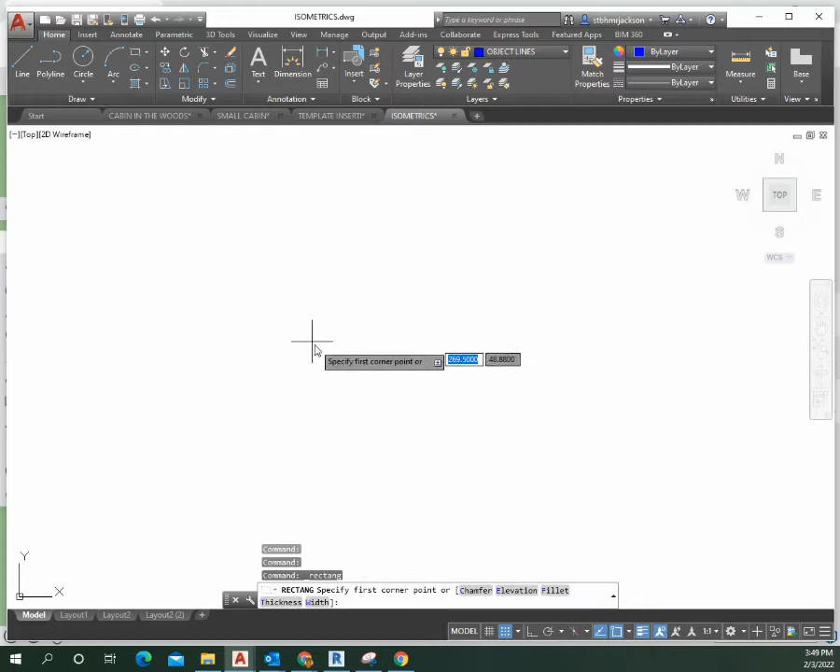We're going to start out with a square, 2.13 all the way around. You're going to use a rectangle for that, and I suggest using a rectangle instead of lines because it'll be a little bit easier in the end. So we're just going to do 2.13, hit the tab key, 2.13, and hit the enter button.

Now our next step is to rotate it. We're going to pick a corner, and we're going to type in 45 for the degree.

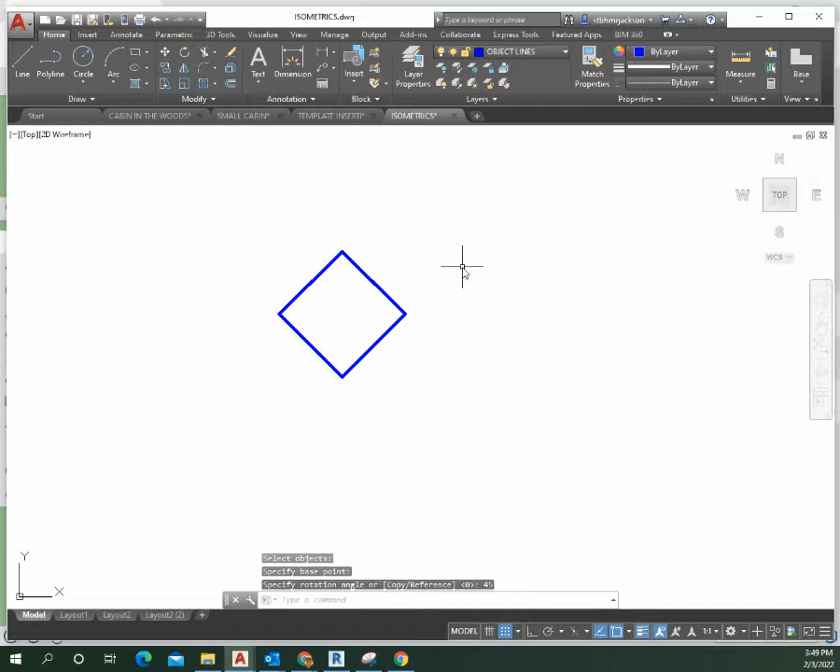So our next step, we're going to draw a line across the middle, and we're just going to make it a little bit longer than what we need.

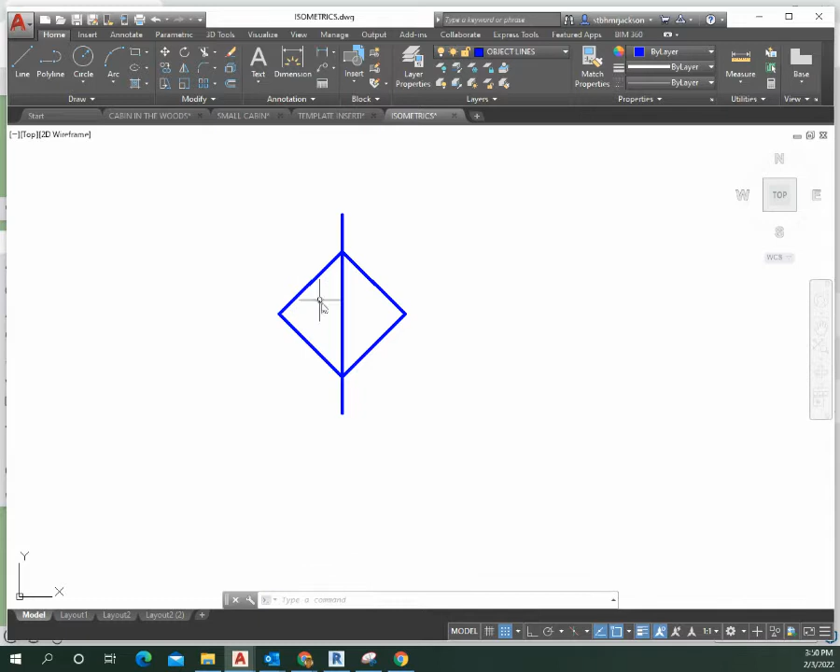We're just going to center it by using our tracking system. You can also do it mid between 2 points, and it'll work just the same. So if you grab it, select it, hold down the shift key, right mouse click, do mid between 2 points. It does the same thing.

Okay, our object is 7.5 inches long, so from one end to the next is 3.75 offset. So we're going to go ahead and make a line across the middle also.

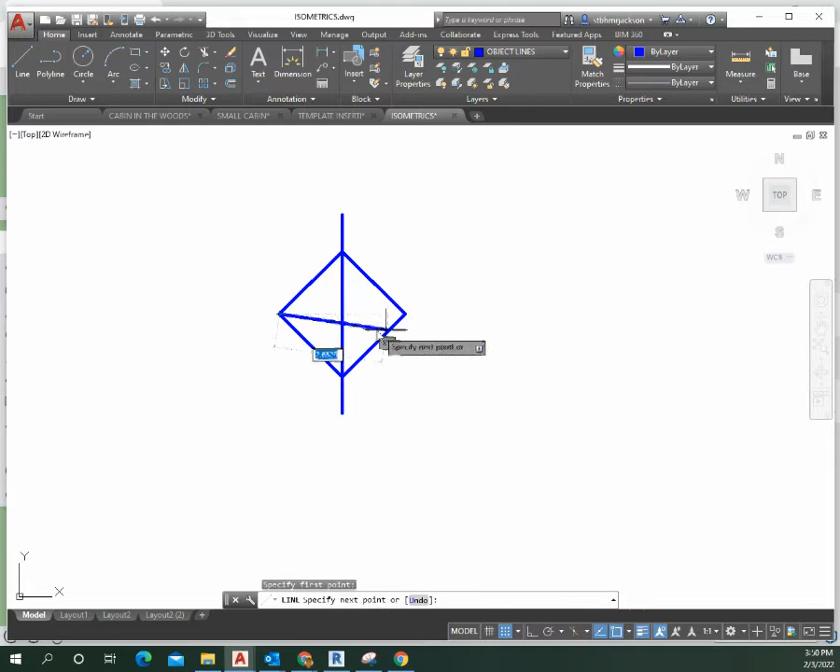We're going to do both our horizontal and vertical offsets. Those are going to be offsetting vertical and up and down 2.25. So the vertical line is going to be offsetting 3.75, and these are going to be offsetting 2.25.

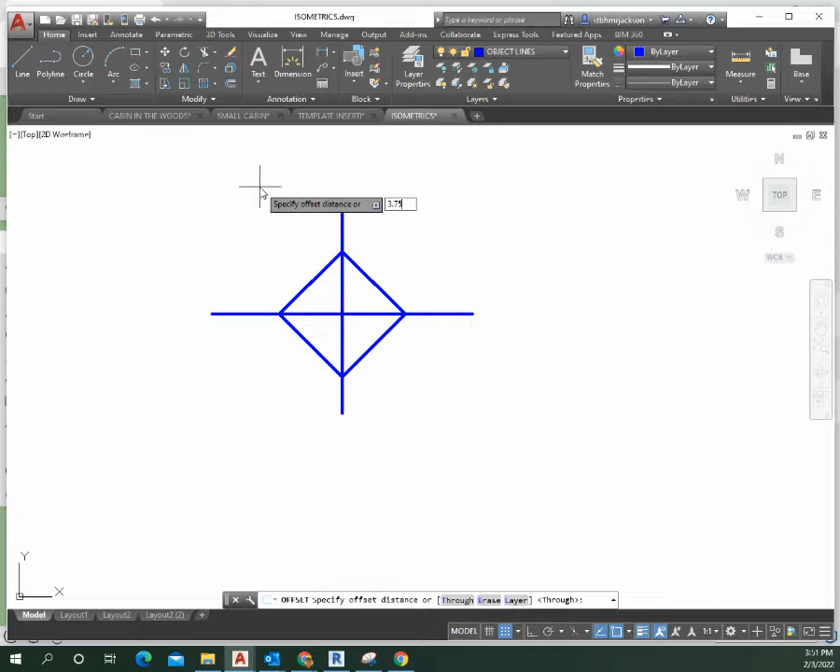So we're going to go ahead and do our offsets. We're going to click on our offset, or type in the letter O, hit the enter button, and we're going to do our first one, which is 3.75. So we're going to type that in, hit the enter button, click to the right and click to the left.

Then, in order to get our other one, we're going to do offset again. I'm going to replace the 3.75 number with 2.25, hit enter, and click up and down.

Okay, so our next thing we want to do is actually put in our little bells at the end.

We're going to close these up on the ends by using extend. So we're going to just click on it, hit the drop down next to trim, click on extend, hit the enter button.

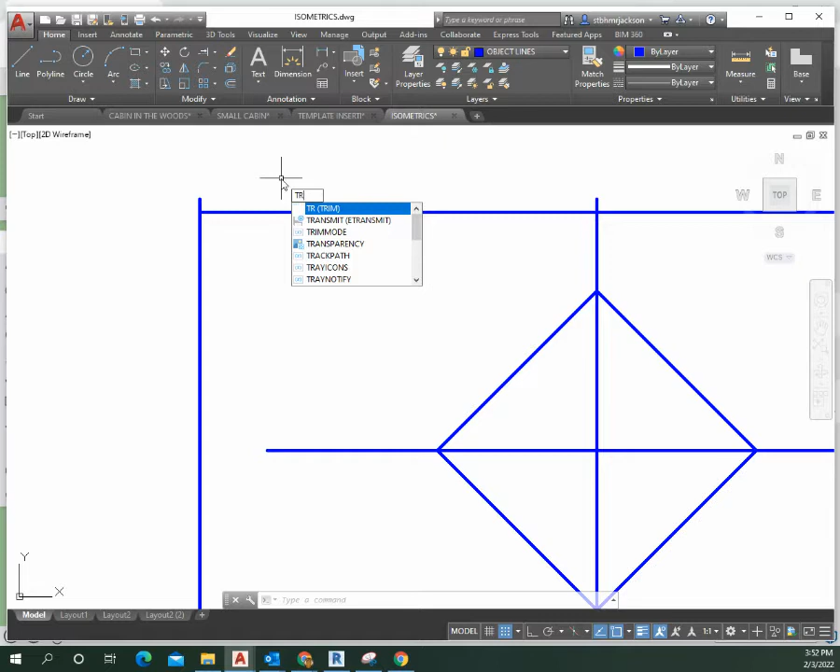And we're going to use extend to close these up. Since we got a few little pieces hanging off the edges, we can use trim for that. Do TR, hit the enter button twice, and we'll cut off all the excess.

Okay, so next we'll be utilizing our offset, and we're going to offset down 1.13. So we're going to be offsetting the top line down 1.13.

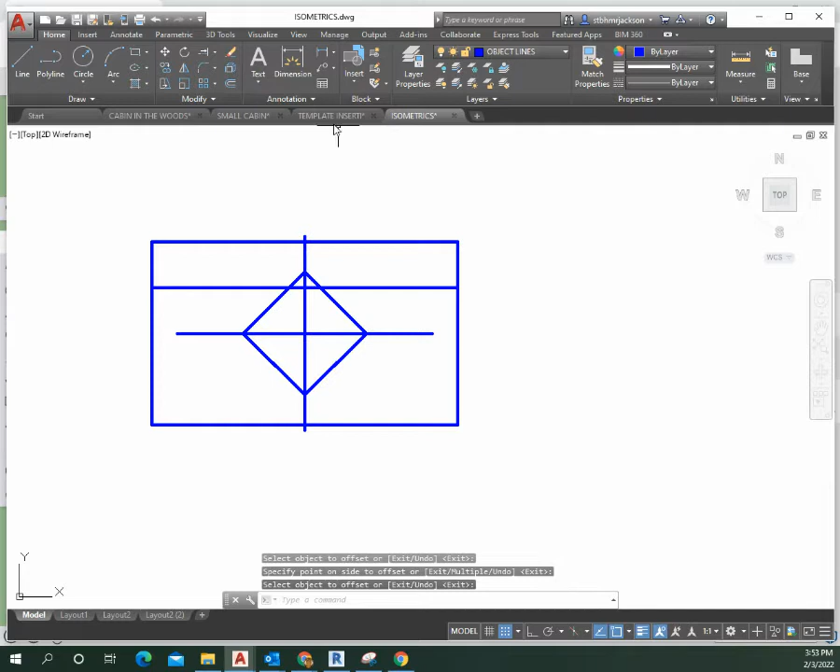And we're going to rotate that line 30 degrees. Now, since it has to go this way, it's actually going to be negative 30.

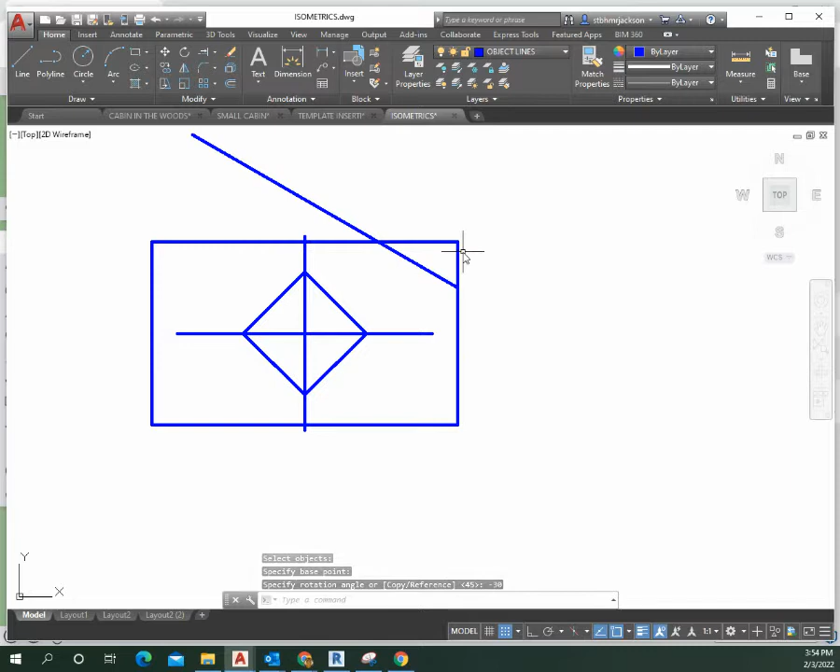Okay, so we'll do a little trimming. I'm going to select trim and then hit the enter button. Now, we can repeat that same step all the way around, but we can also use mirror.

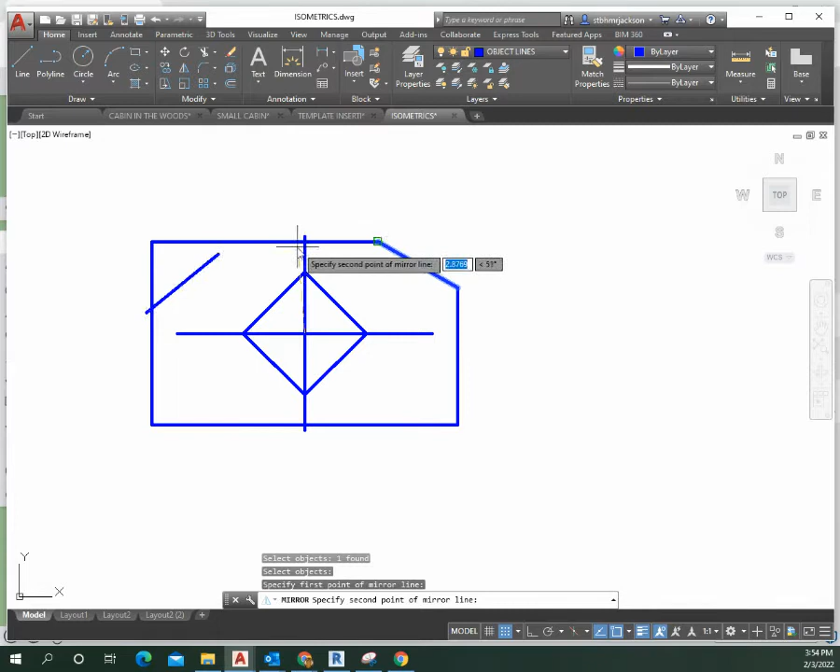So with mirror, we're just going to select the object and line up with the center, or pick a point that's on the center line here in the middle. So click once, hit the enter button.

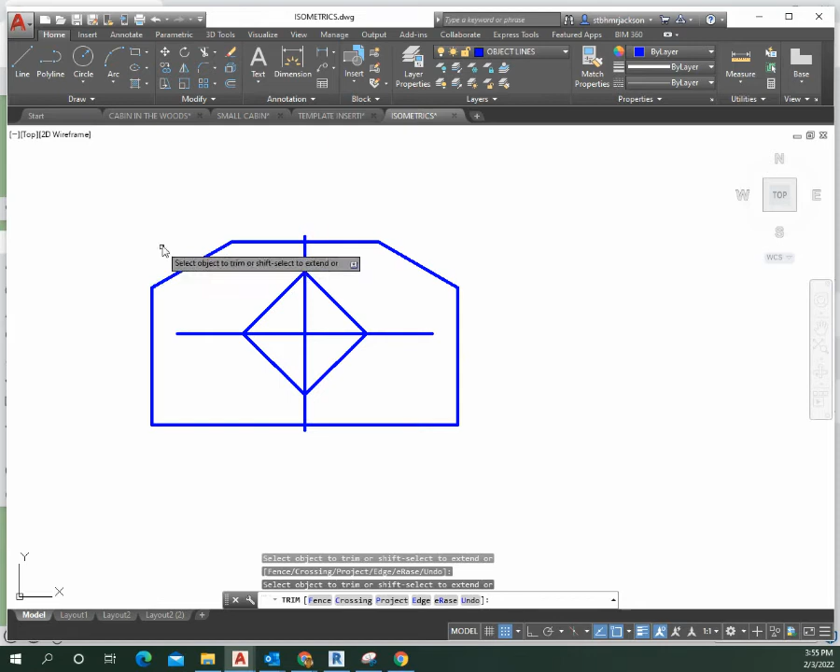To trim, mirror that to the other side. So here again, we're just going to trim. Click on trim and hit the enter button, or you can type in TR, hit the enter button twice.

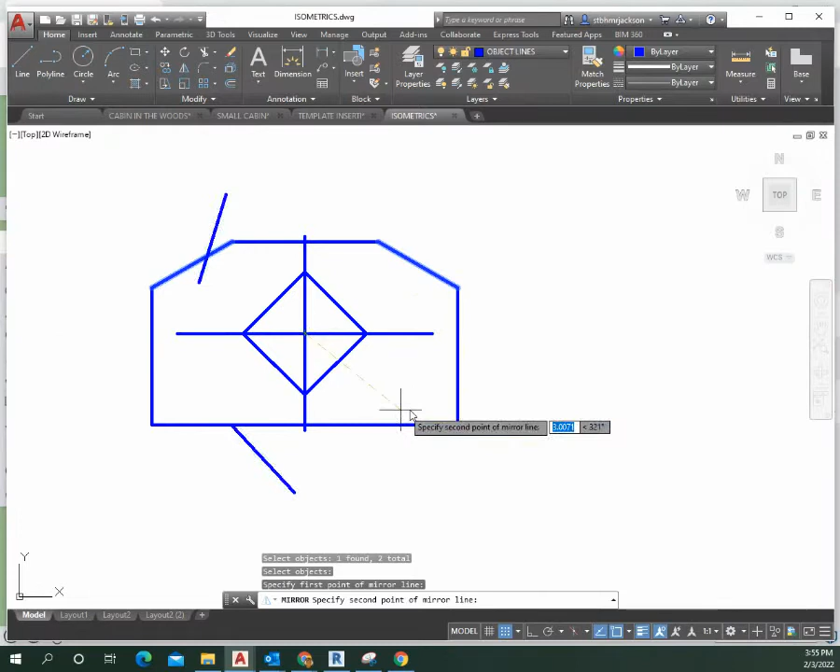Next we'll do the same thing for the bottom. We hit the enter button. After we select it, we'll go to the middle and turn our ortho on. If you're moving freely about, remember you can lock your mouse into place by using the ortho command.

So we'll go to the left or to the right and click once, hit the enter button once. And again, using trim.

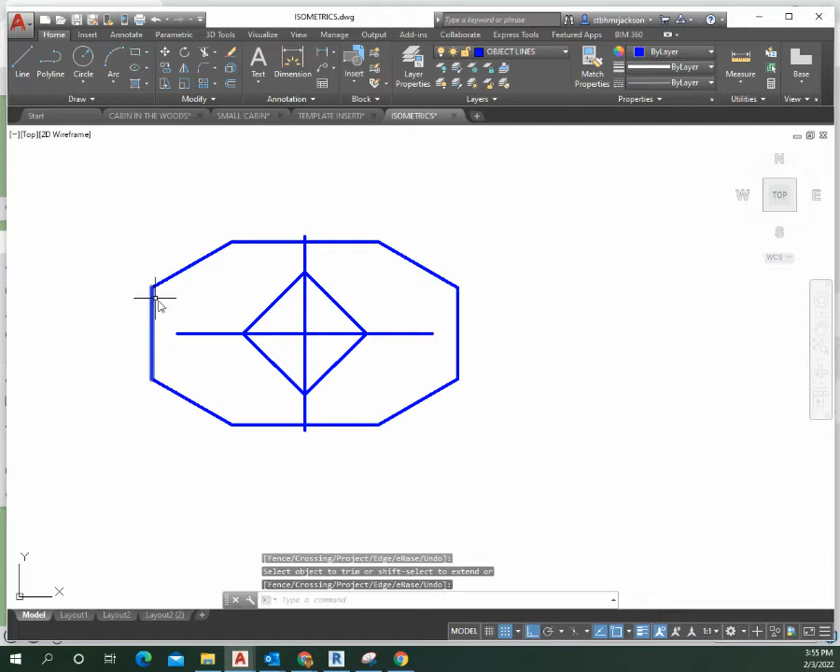Next, we're going to take our middle line here. We'll stretch it out a little bit. We're going to offset it 0.50 up and down. And then we're going to offset this line 1.50 inside.

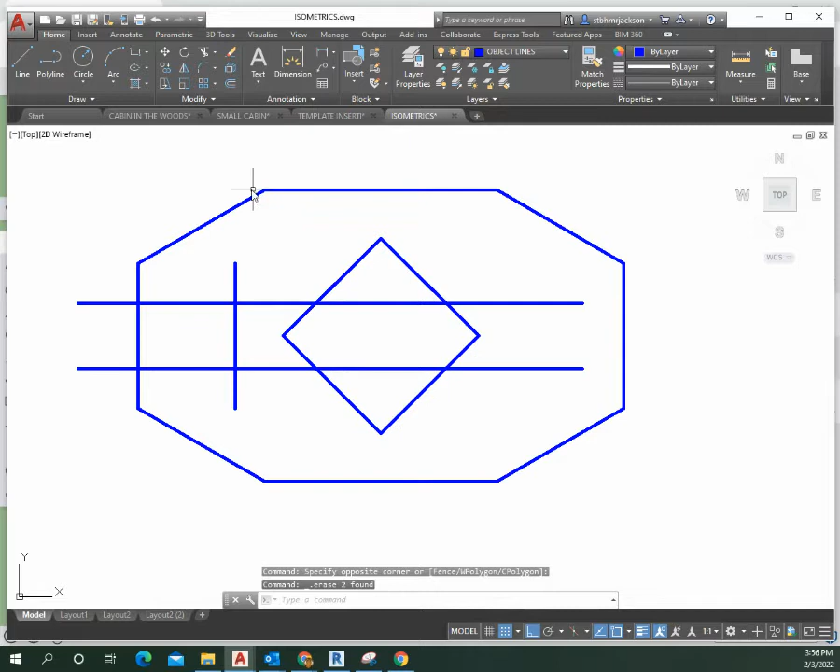We no longer really need all these extra lines here, so we can get rid of those. We're just going to do a little trimming. Click on trim, hit the enter button, and start cutting off all the stuff that we don't need here.

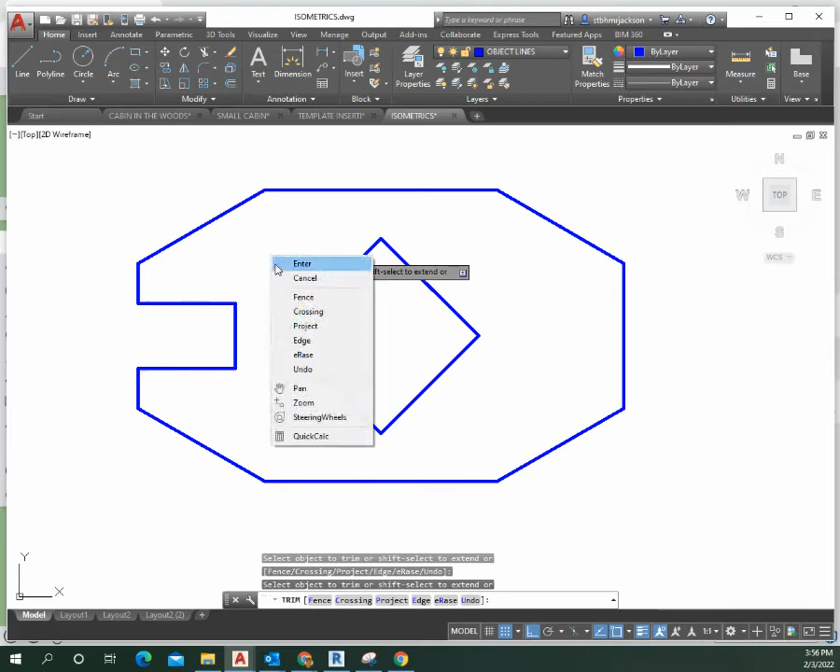And of course, you can guess what the last thing is, the mirror. So we're going to mirror these 3 lines. Enter. We'll pick a base point right at the top of this diamond, move our mouse up or down, click once, hit the enter button once.

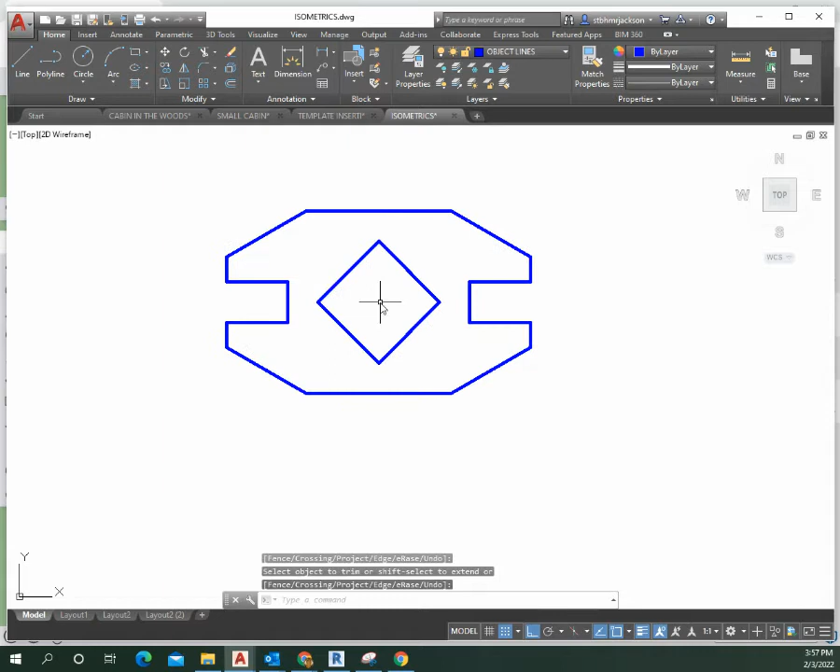Last but not least, we'll use trim again. And that is the completed gasket. So our last step is to just place a few dimensions on it that are on the paper.

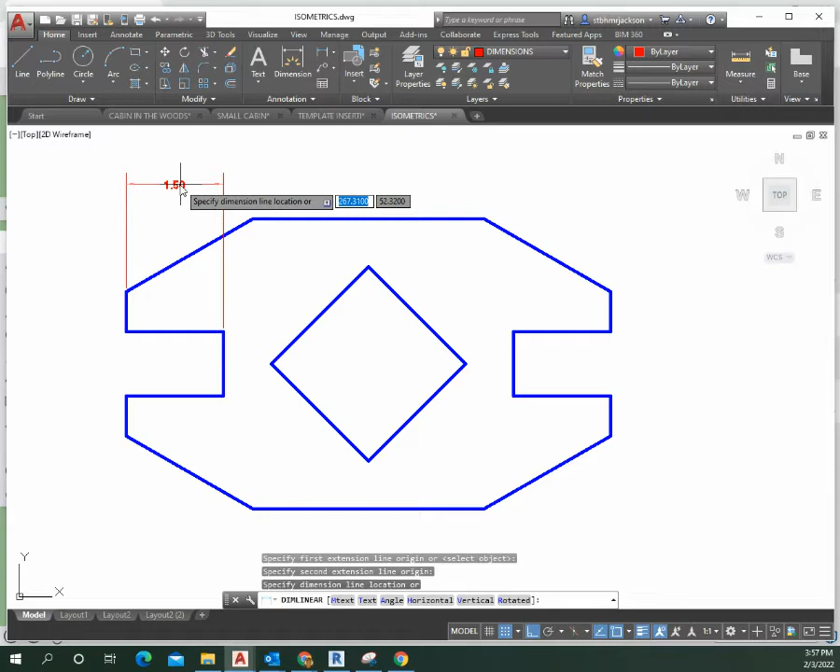We'll use dimension, and all of these dimensions are linear with the exception of one. I'm just going to drag it up, do the same thing on the opposite side. We're just going to go to the middle.

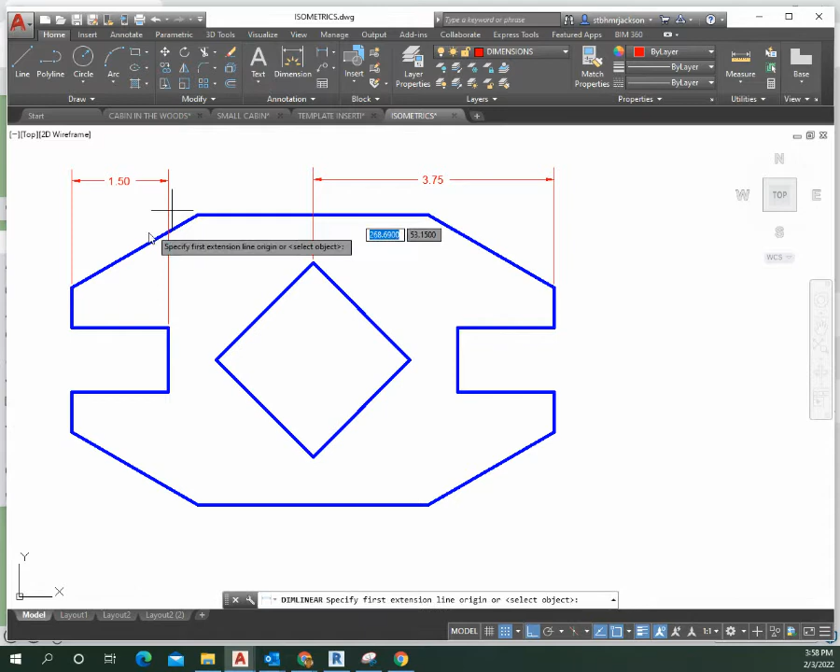In order to line this up perfectly, we'll just touch this one over here on this side. And we'll do an overall, one end to the next. I'm going to drag this up, put it above.

Align this one. I'm touching the other one that's already here.

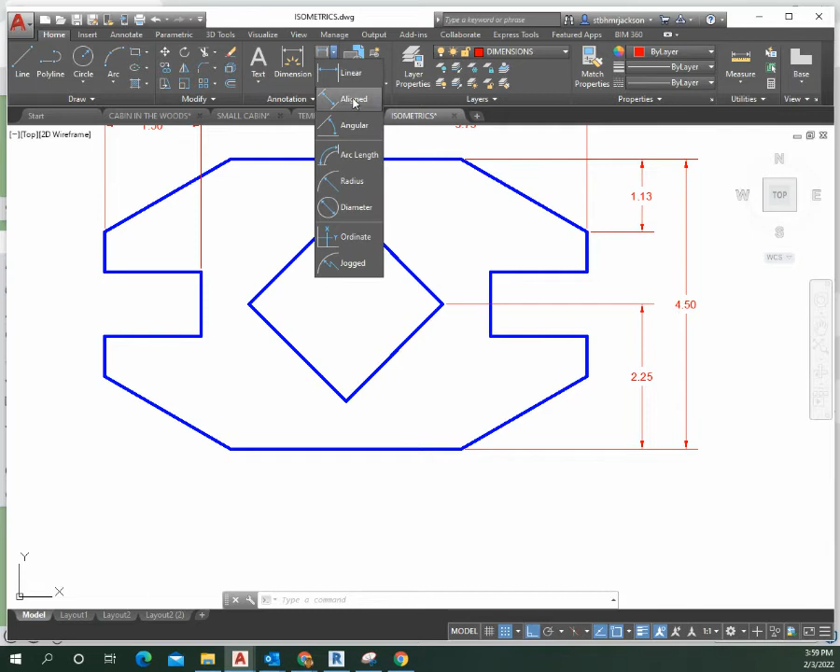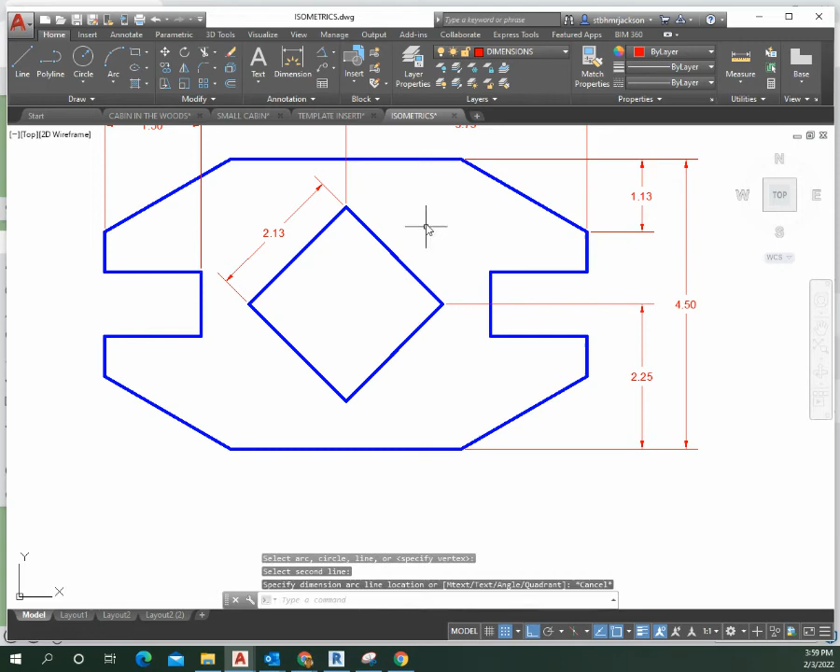All right, so our last two are aligned and angular. This one's going to be 90 degrees. It should be 45, because we didn't put the center line in, so we're not going to even worry about putting that one. So we are going to do the one here.

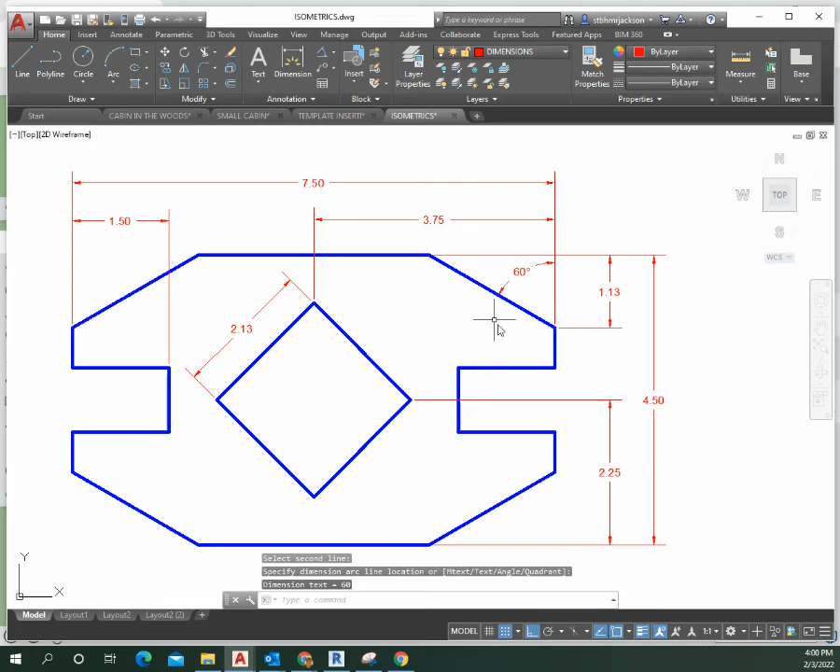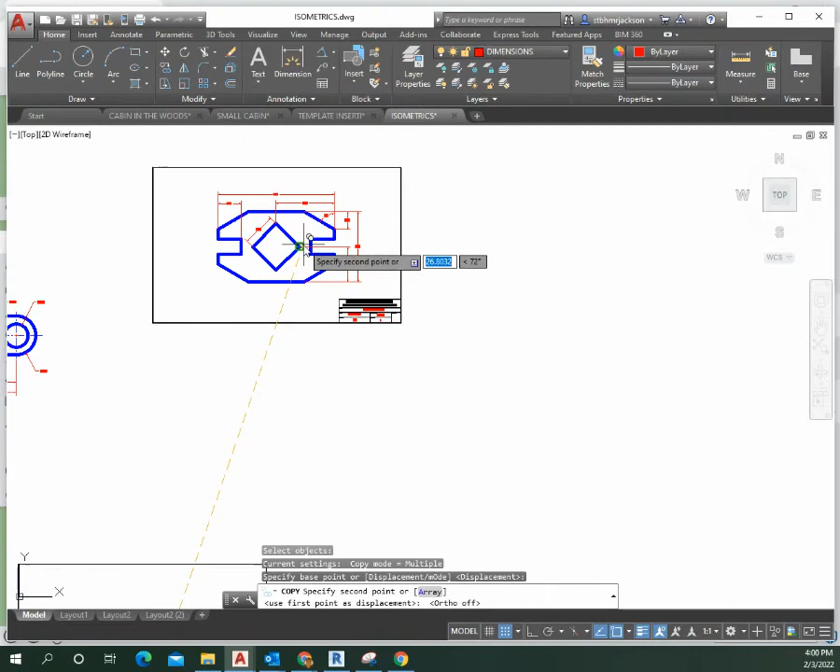And that is it. So last but not least, we'll copy our title blocks that we already have, and we'll place it around this one, and we try to get it as centered as much as possible.

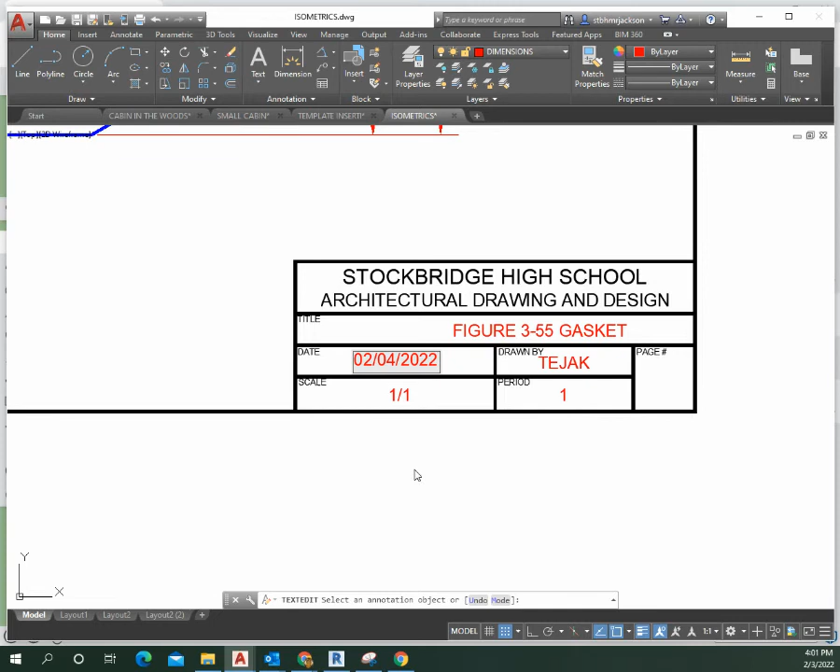And we'll change the title, change the date. Scale is 1:1. First period, drawn by...

Last but not least, you're going to export this as a PDF. So you're going to give it a file name: skills assessment, dash your name.

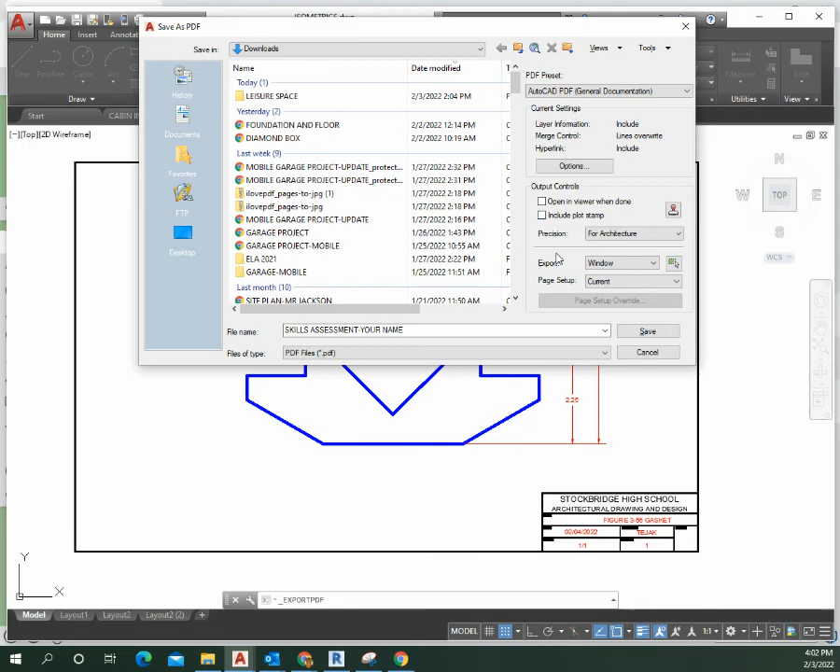And you're going to come here, you're going to choose window. If it's still on display, hit window, and if it pops back onto the screen you'll find it. If it doesn't, click on the little square next to window, and you'll make a window from one corner to the next. Make sure that you actually touch the title block when you do this.

All right, and then you'll hit save, and it'll blink. And once it does that, you are complete with that particular one.

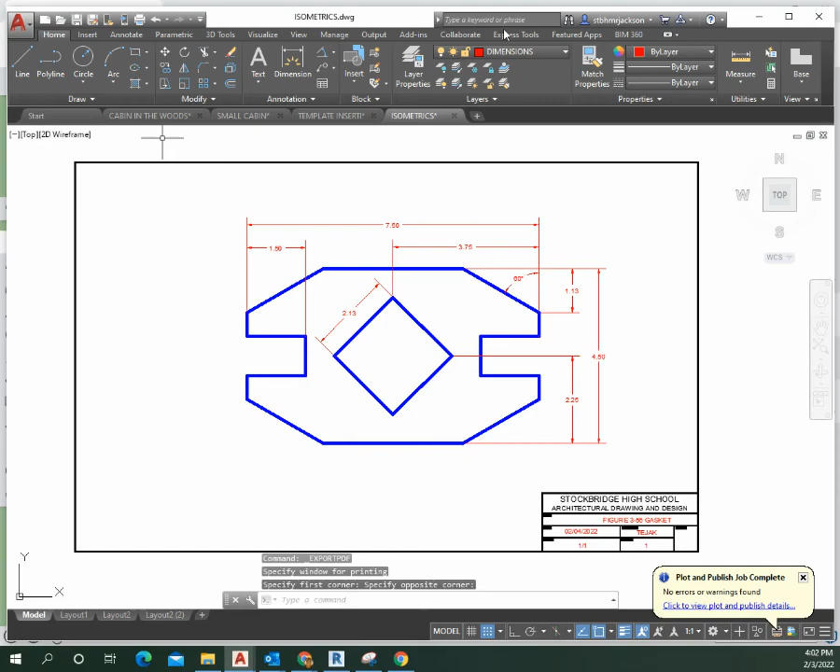So your next step is just to upload it on Schoology, inside a week 4 folder. Skills assessment.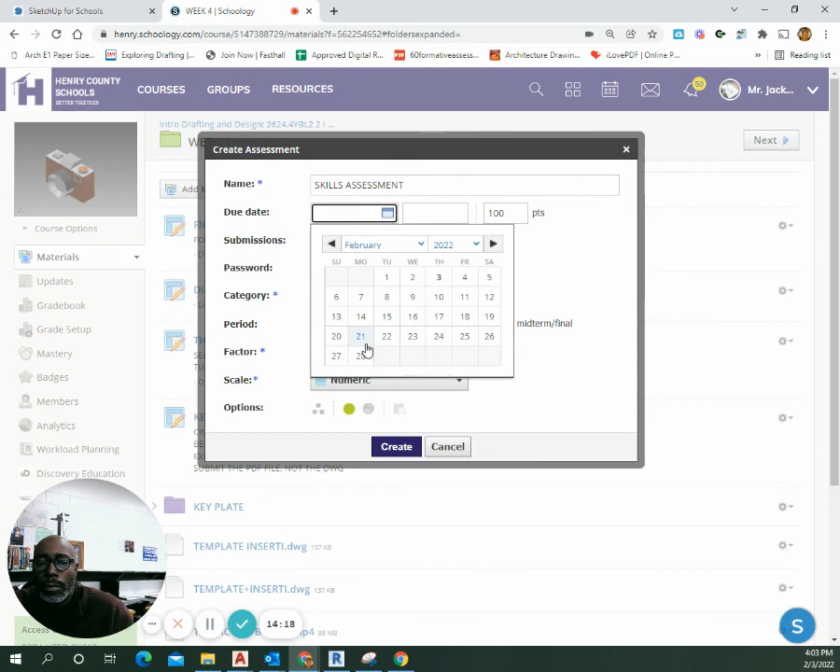And it's rolling. So that you're going to turn in the actual PDF file. We'll be counting it as a test grade, so you have to make sure that you are actually turning in a correct file.

And that is it. So it should be at the top of your folder in week 4.